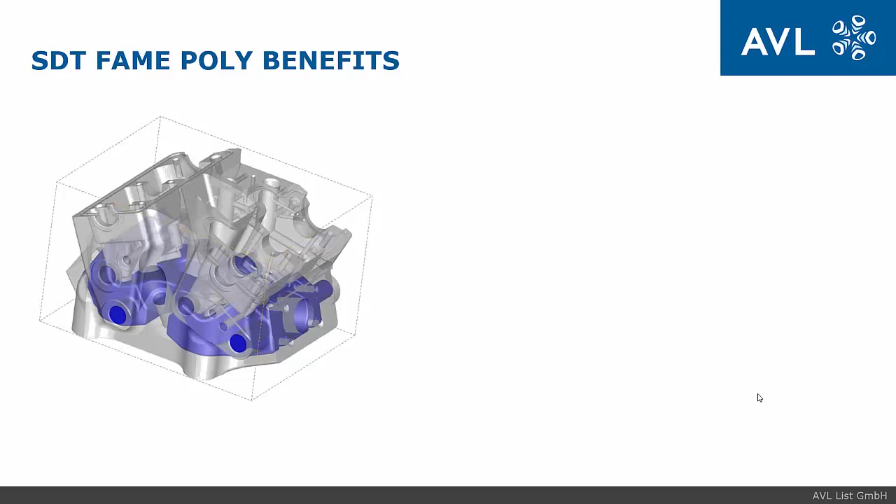I will start at the beginning with Poly benefits. The preprocessor of FireM has many possibilities, from multi-domain meshing, user-defined boundary layers, to embedding different volume meshes to Poly while avoiding arbitrary interfaces. The related graphical user interface is fast, reliable and modern looking.

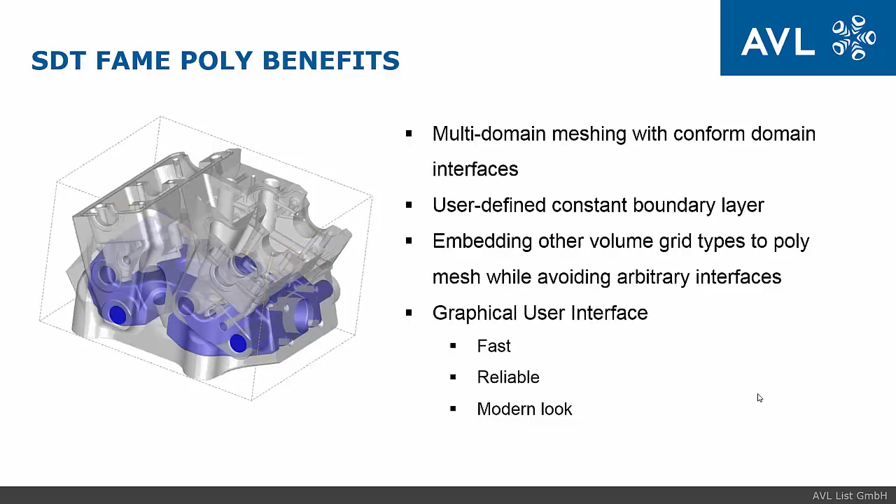In today's session, I will introduce how we can get a mesh from importing the surface, with preparation to make a quality check and surface repair. The next required input is creation of selections and edges. And finally I present the advanced mode of the meshing process.

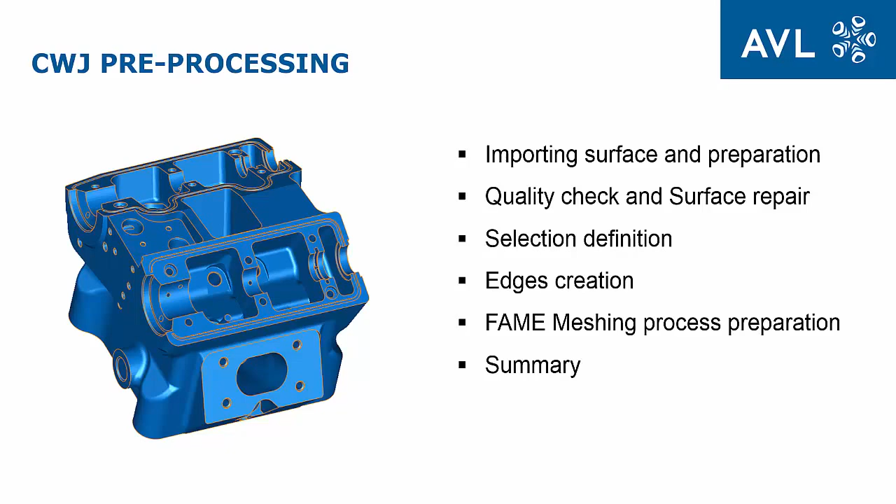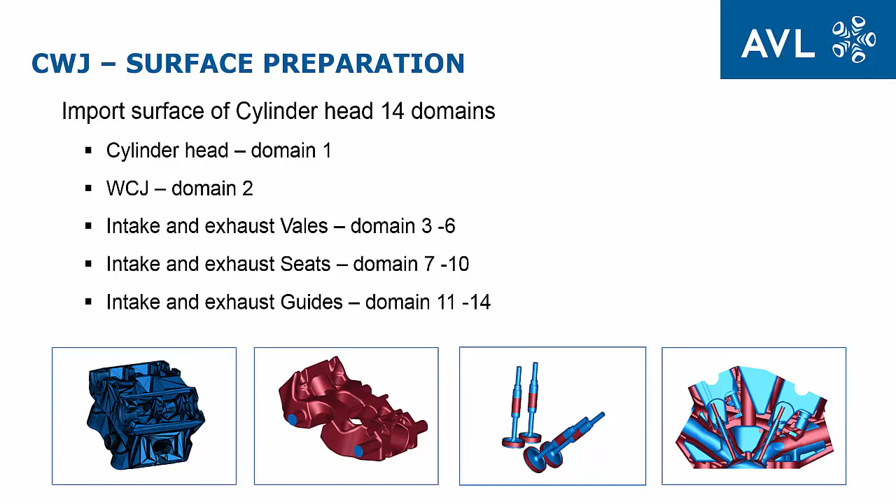On importing the surface with 14 domains, it is suggested to check all of the domains. I demonstrate to you all the corresponding domains. First is the cylinder head, the second one is the water cooling jacket, and the rest of the domains belong to intake and exhaust valves, seats and guides.

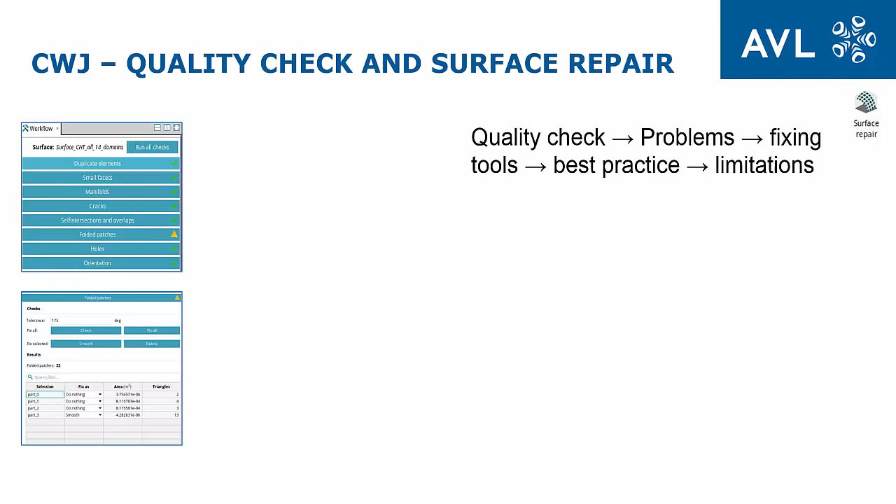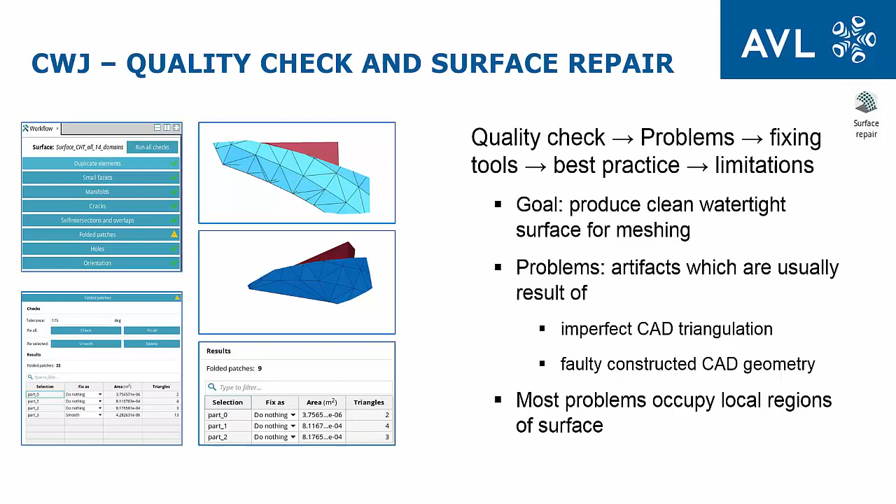The quality check is required as the next important step. To handle the problems in the surface mesh, some practice is needed. What should be fixed? The major goal is to produce a clean, watertight surface for meshing. The artifacts usually come from imperfect CAD triangulation and faultily constructed CAD geometry.

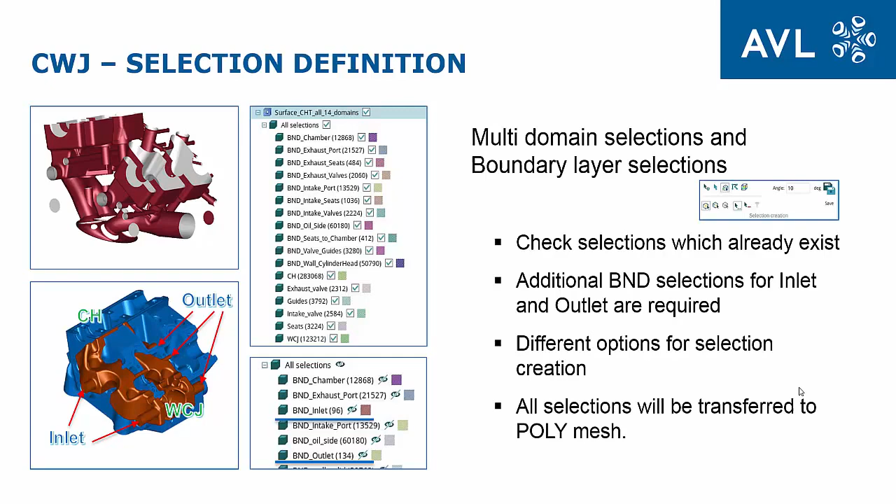The next step which should be applied is selection definition. In this example, we already predefined the required domain selections and almost all boundary selections. It is not intended to show creating all of the selections. I will show only additional boundary selections for inlet and outlet. All selections will be transferred to the polymesh.

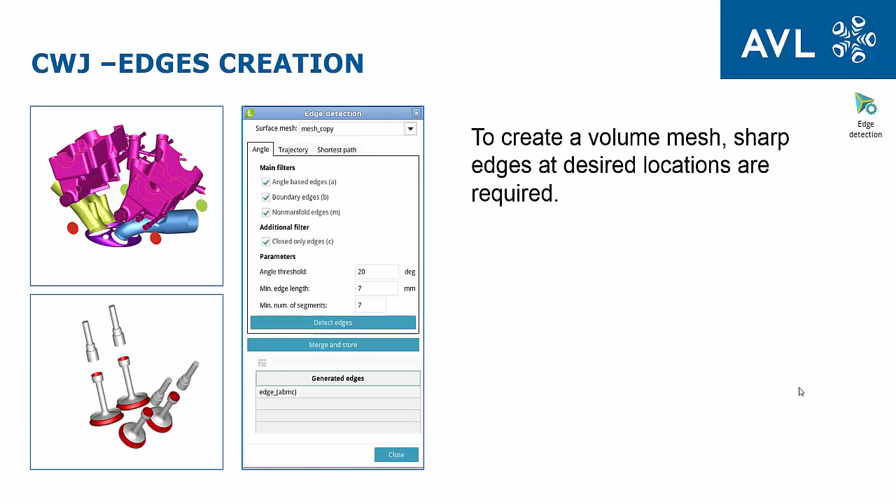The last step before meshing is creation of sharp edges. In the first round, the edges can be made by automatic detection, and it is also possible to manually generate edges depending on the chosen selection or chosen domain. The figure on the top left side shows the edges for our demonstration cylinder head model. I will show how to add edges manually with trajectories and also the shortest path over the valve seats.

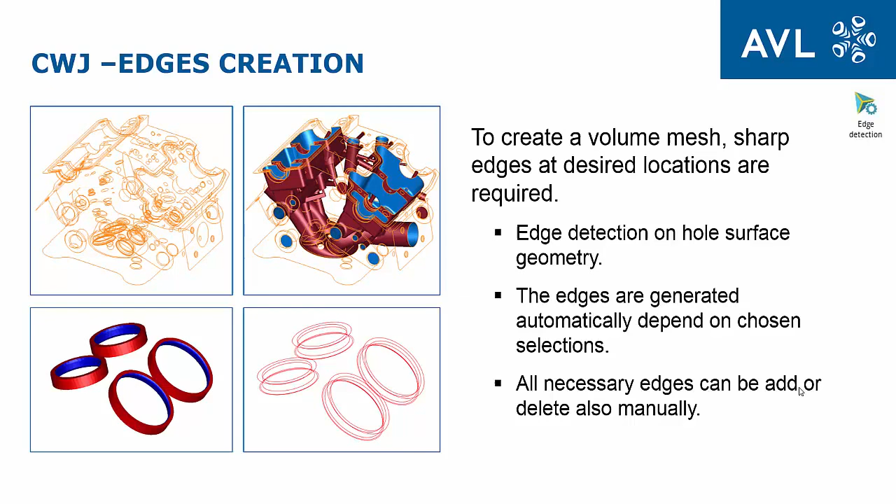And finally, the meshing procedure. The cylinder water jacket multi-material is a complex geometry and some local refinements are required for meshing. I would like to explain the advanced mode of meshing. The basic options include surface and volume target cell size, number of boundary layers and boundary layer thickness. The Analyze button will check the corresponding surface and edges for self-intersections and also watertightness of the surface.

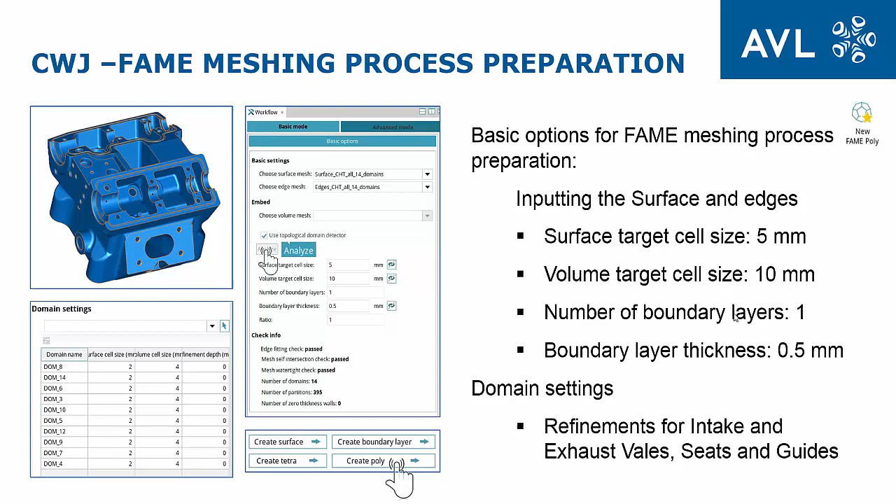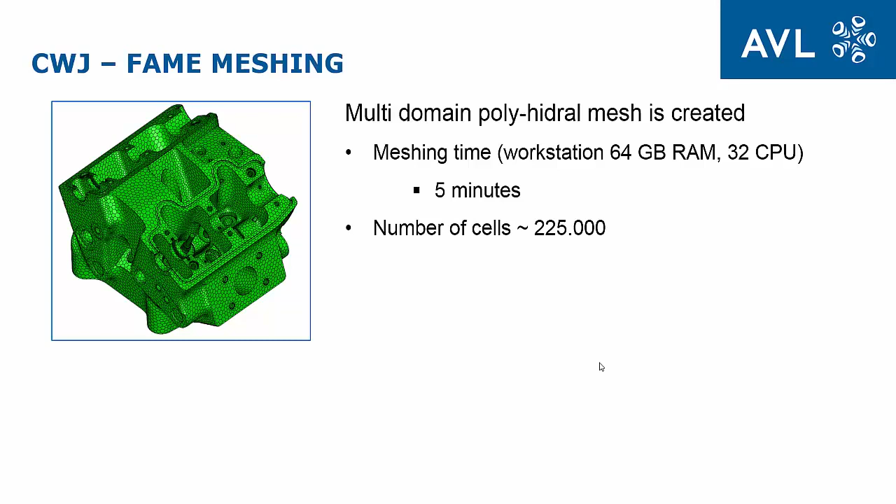After setting all necessary parameters, from basic options over discretization settings to boundary conditions, the user should just apply them to create a polymesh. The multi-domain polyhedral mesh is created within about 5 minutes with the previously shown settings. The mesh is coarse with approximately 225,000 cells. It can also be finer. At the end of the pre-processing session, I will perform the final check and find that the mesh is suitably prepared for CFD simulation.

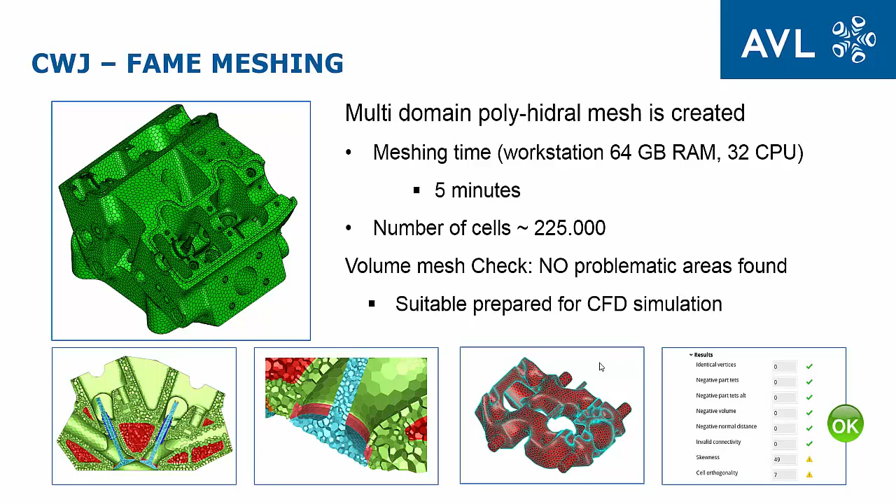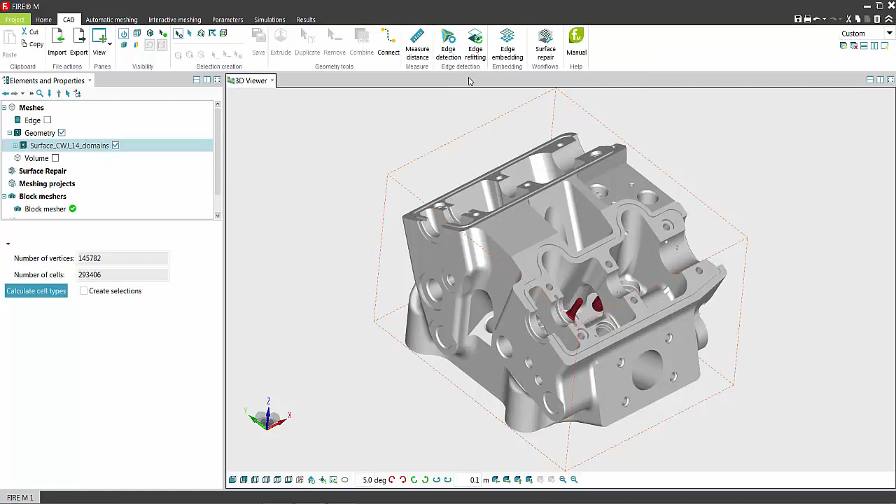Now we switch to live. After opening a new FIRE M, we will import the surface to the 3D viewer. While the surface is loaded, we will perform the surface check in the Surface Repair tool as the first step. The surface should be activated in the element tree, also possible to activate it in the 3D viewer. Start the Surface Repair tool. The new workflow window pops up automatically.

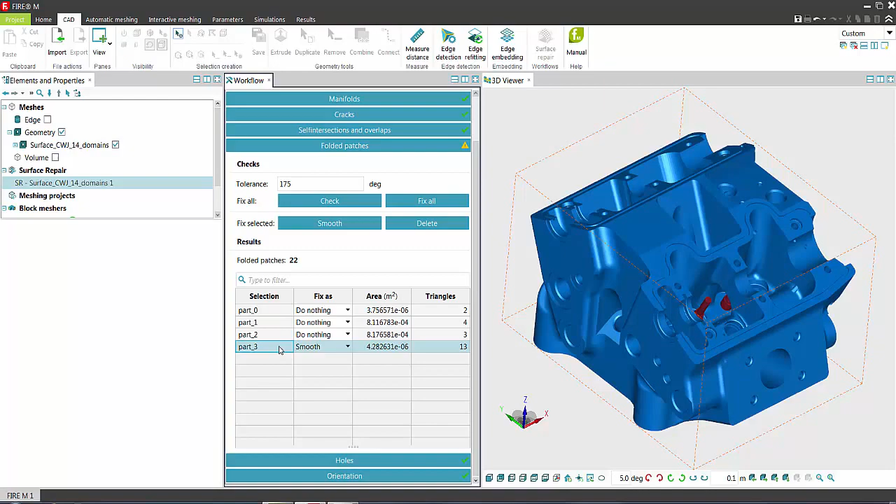Now run all the checks. While observing the artifacts, we found that duplicate elements, small facets, non-manifolds, cracks, or self-intersections are not present in the surface geometry. Some folded patches exist in the surface. As auto detection, the fix is selected as do nothing. We could leave those patches in the geometry. For demonstration, we will repair a few folded patches to see the repair workflow. After selecting them in the table, they are shown in the viewer on the surface.

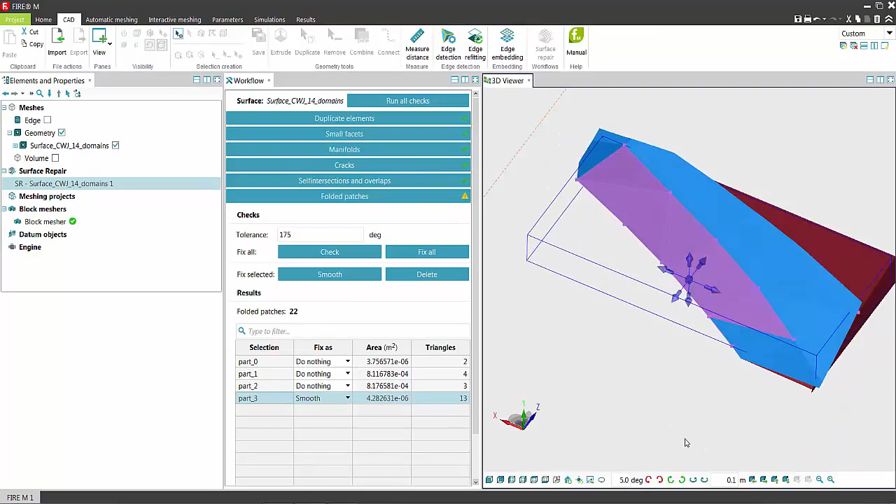We can also apply different visibility as triangulation on surface. After selecting triangles, we remove them by pressing Remove in Geometry Tools. We repeat the step for others.

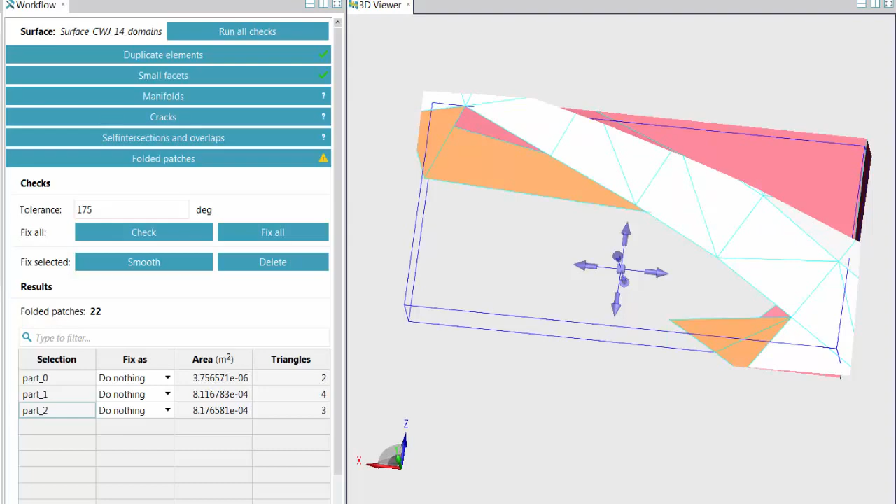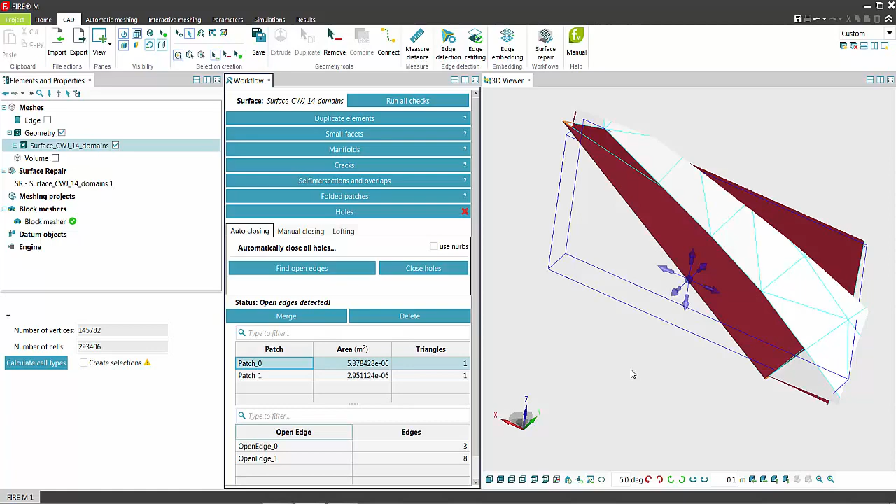Now continue to repair holes and find open edges. The hole is found and edge is generated. After pressing Close Hole, the patch is generated just on one side, clearly and precisely closing the hole. Repeat the procedure for second patch.

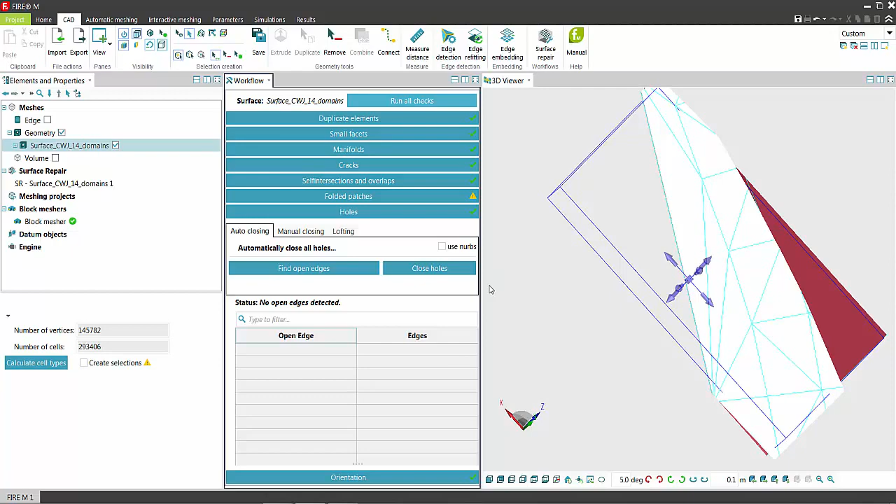Now let's perform the final check. After all check marks are green, we can continue forward. To undo the view, we use Reset Cutting Box in the visibility window.

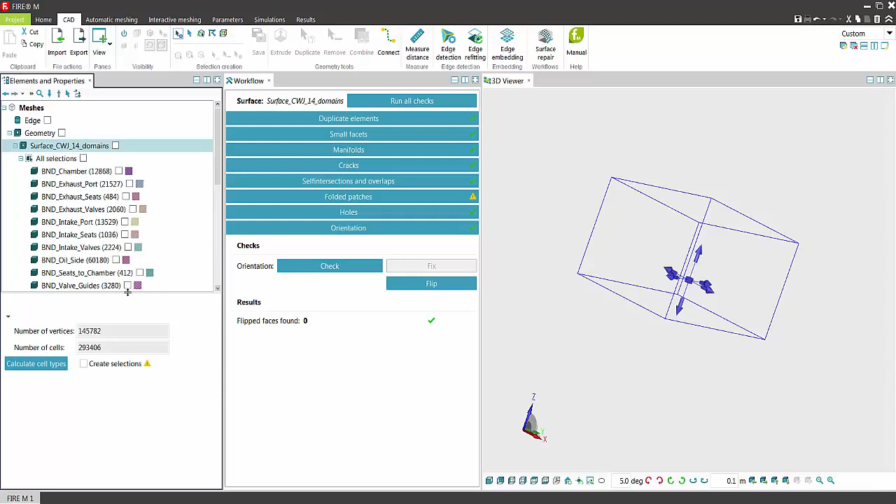The next step is checking selections. This we can do in the element tree by expanding the toggle switch. We can check domain selections and boundary selections by activating and coloring them in the element tree. Using the Ctrl and Shift buttons also helps to do this.

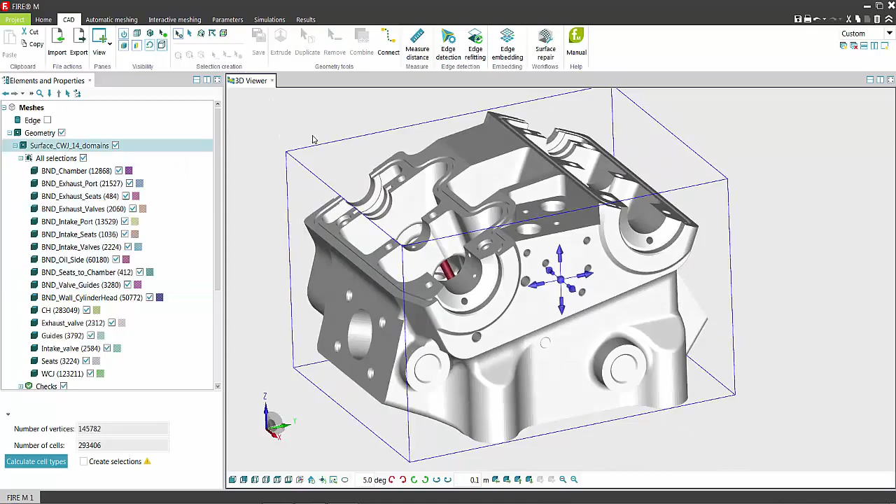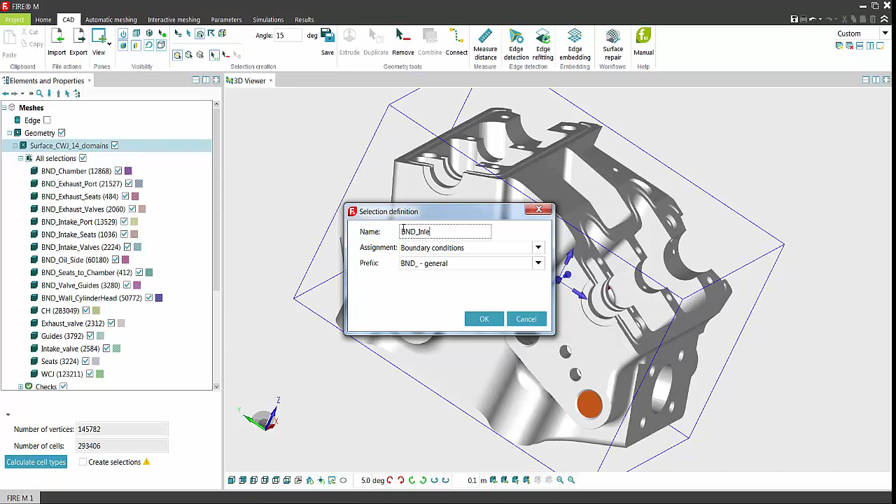For creating selections for inlet and outlet, we will use angle-based selection. We change the angle to 15 degrees and now select the inlet of the water cooling jacket. For saving selections, the Save button in the ribbon bar is used. Add a name, BND_inlet. Then repeat the procedure for BND_outlet.

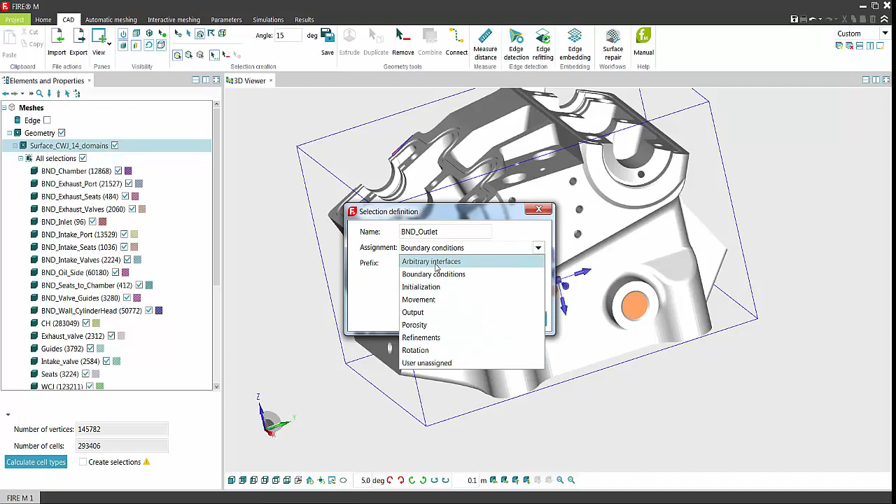If the name of the selection has a prefix such as BND, INI, or else, the selection is automatically saved under a specific folder with the given name. Now we continue to create sharp edges on surface geometry. The cut geometry has to be activated.

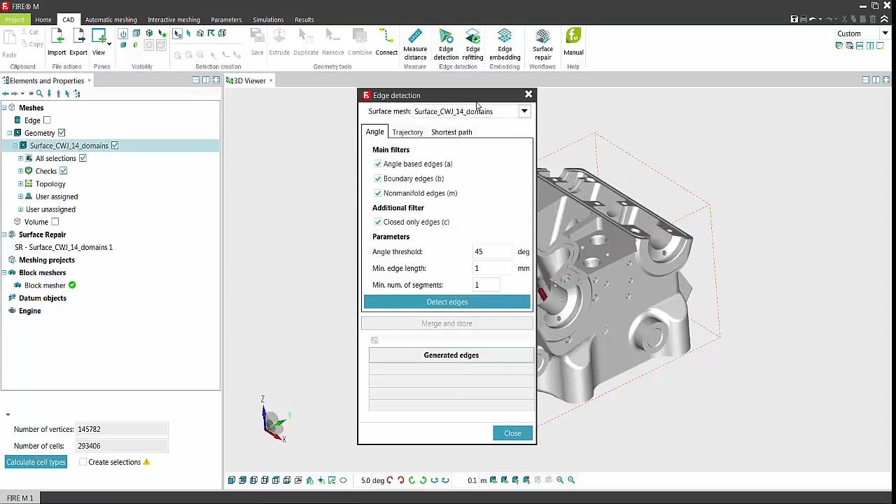By pressing Edge Detection in the ribbon bar, we have to define parameters for locating edges. From the default values, change to 20 degrees for angle threshold, 10 mm for minimum edge length, and 10 for minimum number of segments. Now I will apply Detect Edges.

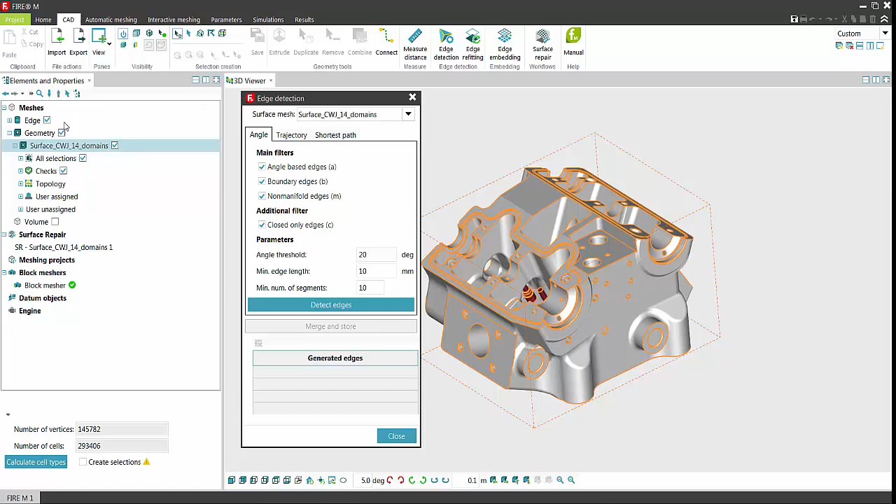While edges are generated automatically, we should merge them to geometry and store them to the element tree in the project. Since some unnecessary edges were created, we can manually delete them from saved edges. I will remove them with angle-based selection and also polygon-based removing.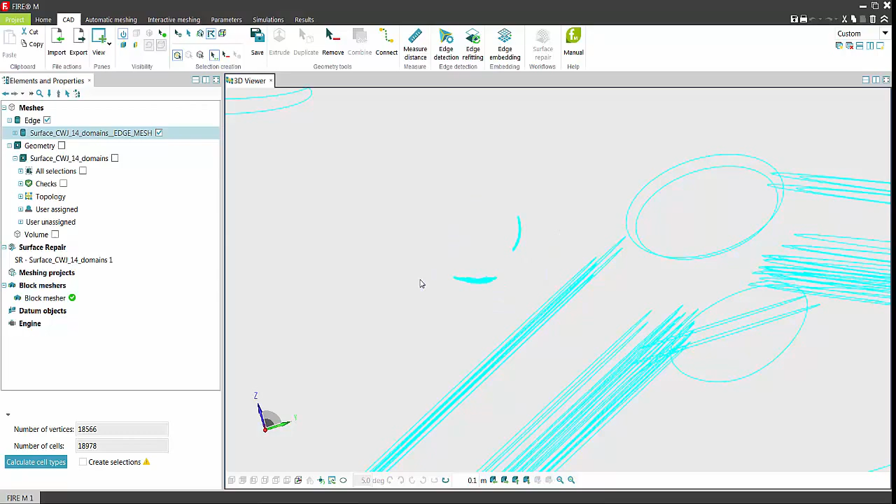I will show how to remove edges with polygon selection. Go around the edges and confirm with the Enter button, then press Remove. Now we will continue with removing unnecessary edges around guides. I will use an angle-based selection and repeat the step, confirming with Enter and selecting Remove from the ribbon bar.

Now we click on an edge near the guide. When some edges are selected, they are highlighted and can be removed.

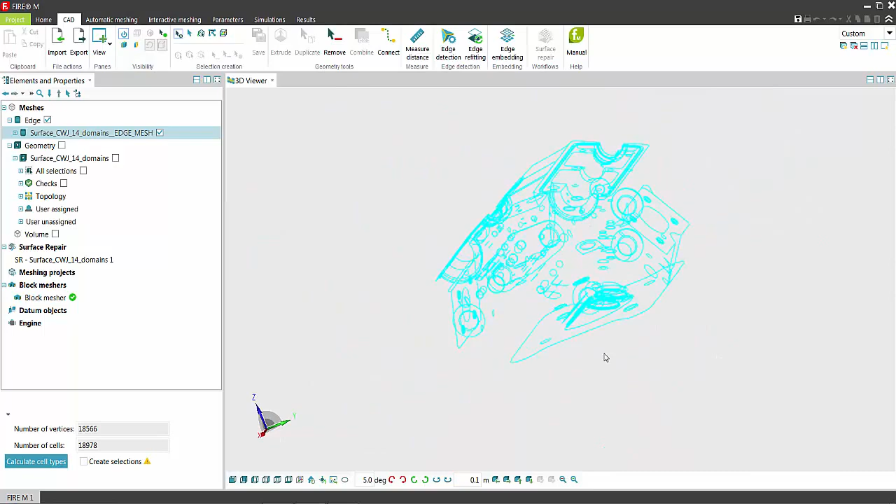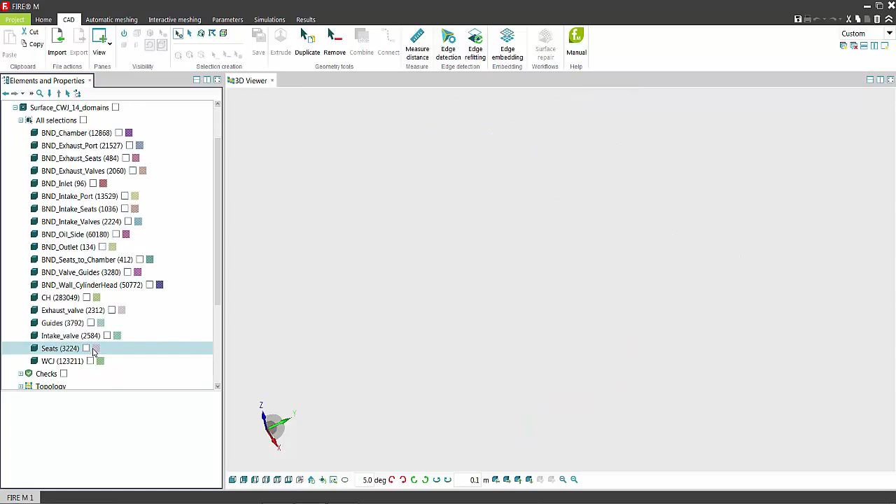For prescribing all necessary edges, we can add them manually over selected domains or boundary selections. In the element tree, I will select the selection of intake and exhaust seats, and after they are visible in the viewer, click on duplicate the selection. The new geometry is created and shown as mesh copy in the 3D viewer and also in the element tree.

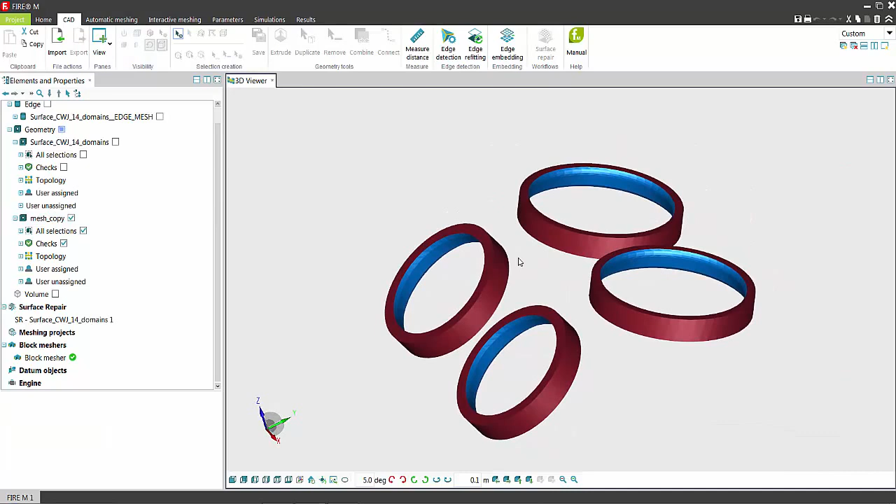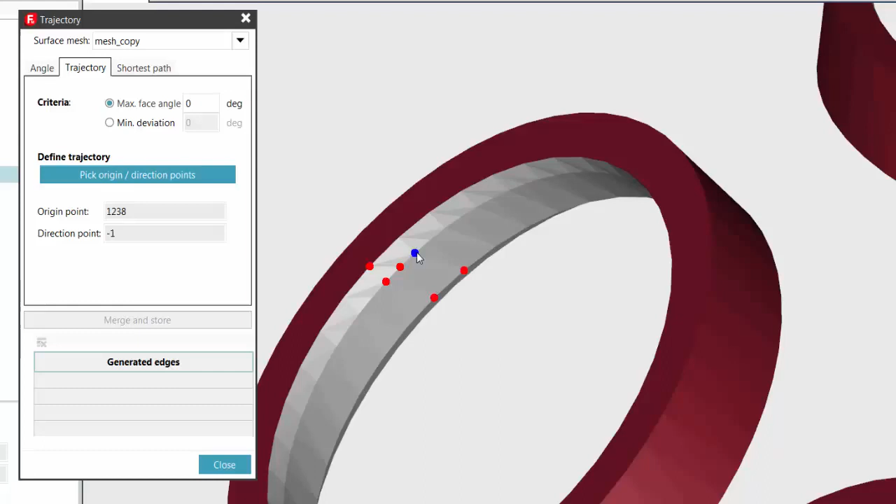Multiple selected selections can also be used for generating edges. Select only seats as mesh copy in the element tree and open the edge detection window one more time. Switch the tab from angle to trajectory and select Define Trajectory. The first click on the model is the location of origin and the second click presents the direction of the edge around. Let's repeat this step for all sharp edges on valve seats.

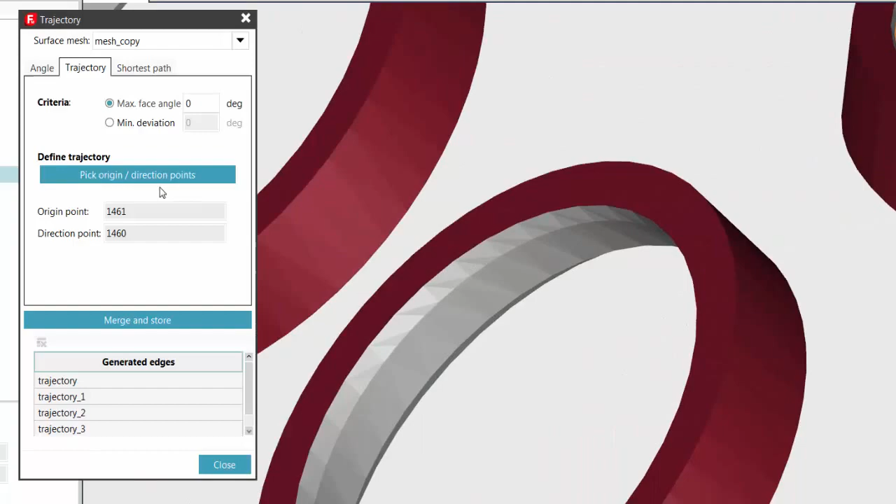For completing the operation, we should save all trajectories to edges with Merge and Store. For joining auto-detected edges and manually made edges, we select them both in the element tree and combine them with an action in Geometry Tools. Previously created edges can be removed from the project.

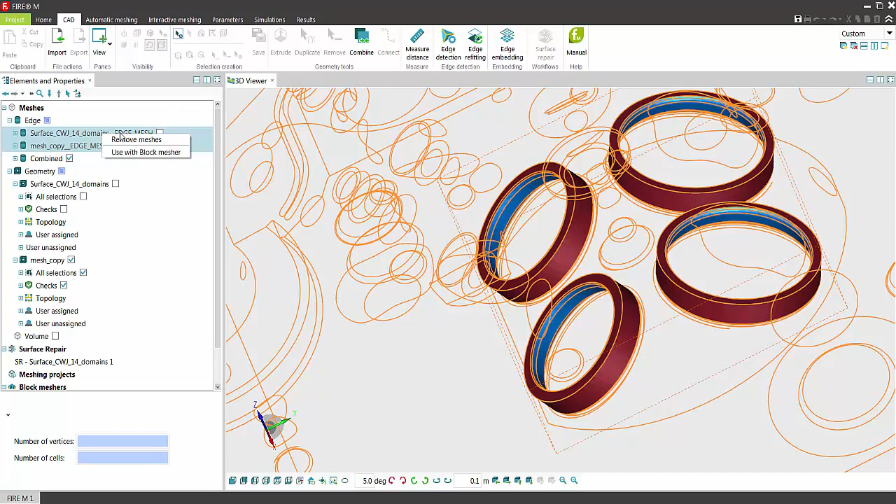Now we can also delete the mesh copy of intake and exhaust seats. Now we have only the created edges and the surface inside the project. I will save the project now.

So the name is given as Fire M1 and the prefix is PROG. Let us proceed to the final step in the pre-processing session.

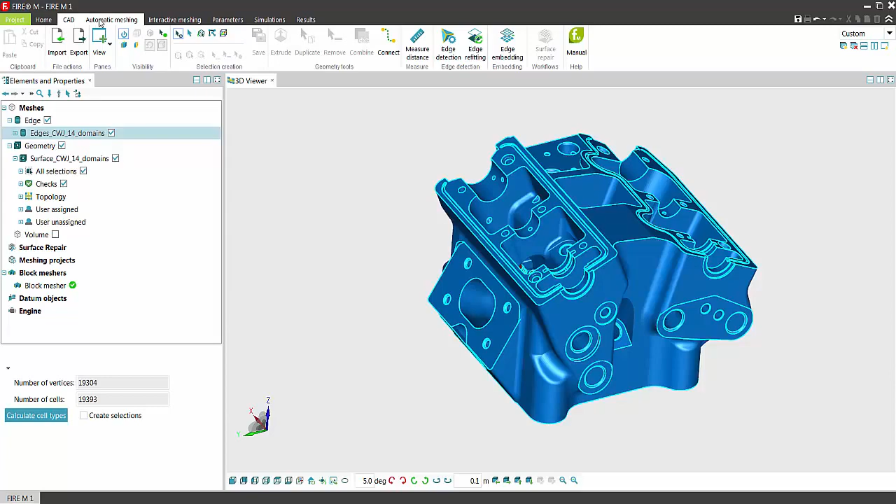In the tab menu, go further to automatic meshing. We can start now a new FAME poly meshing, then switch to advanced mode of meshing.

If in the project only one surface and one edges exist, they are automatically selected in the chosen menu. Press the Analyze button. It will check fitting of corresponding edges, self-intersection, geometry check for water tightness, and also number of domains. If all checks are passed, we can continue to set the meshing procedure.

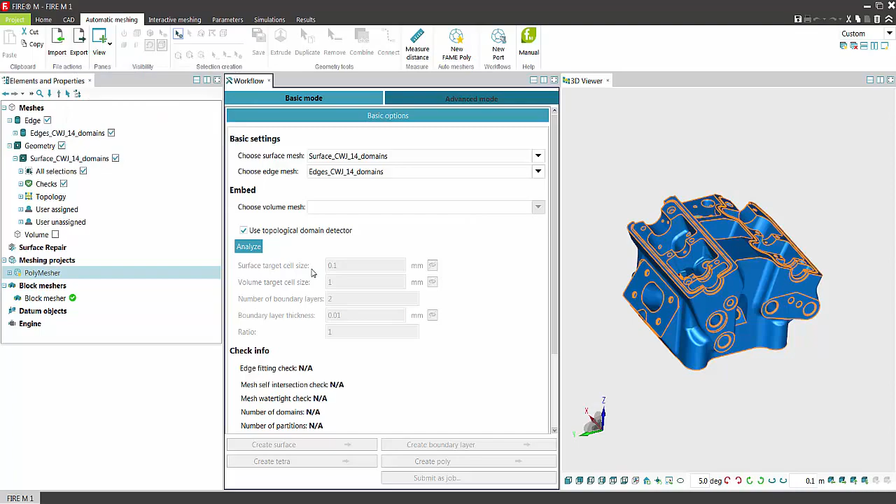We got 14 domains. We will set basic options for meshing. As for surface target cell size, we use 2 mm, for volume target cell size 4 mm, and one boundary layer with 0.5 mm of thickness.

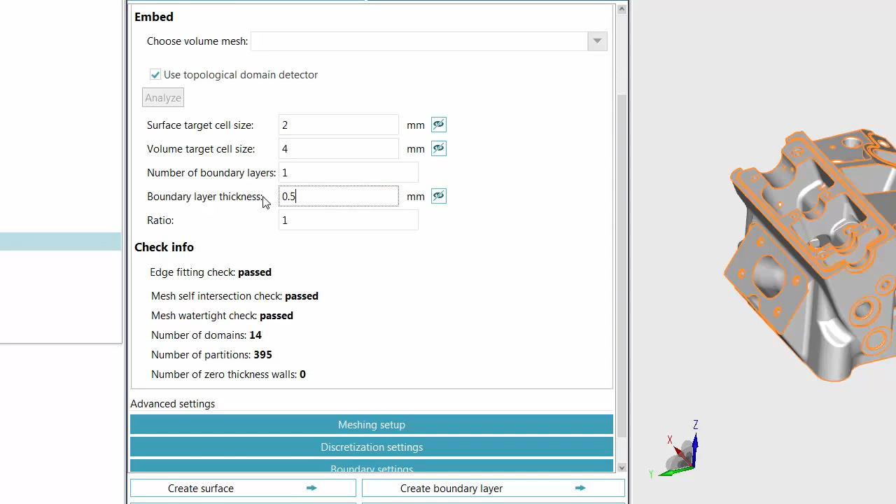In meshing setup, we can check domains and change the type of state as solid and fluid. After meshing, the domain name will be set as the selected state - so FL for fluid and SO for solid.

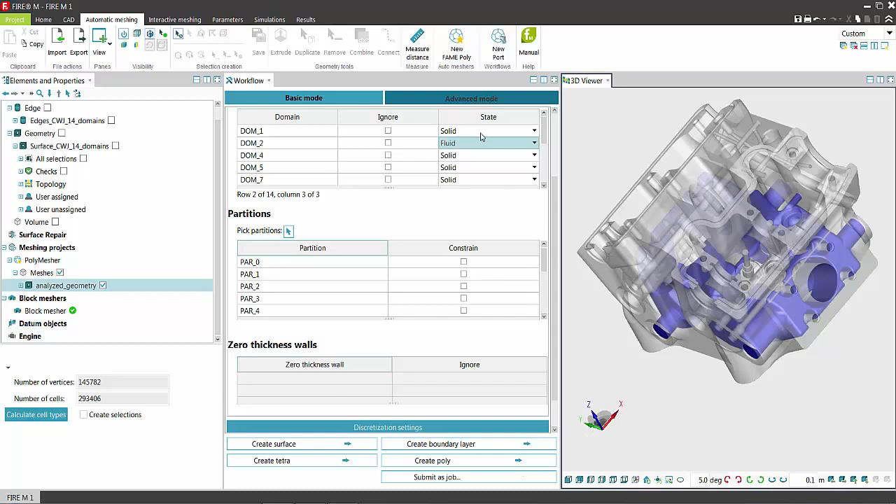In the partition section, we can define constraints for automatically generated partitions, if we want to generate the mesh from exactly the same vertices as the surface has. This is used in the embedding option.

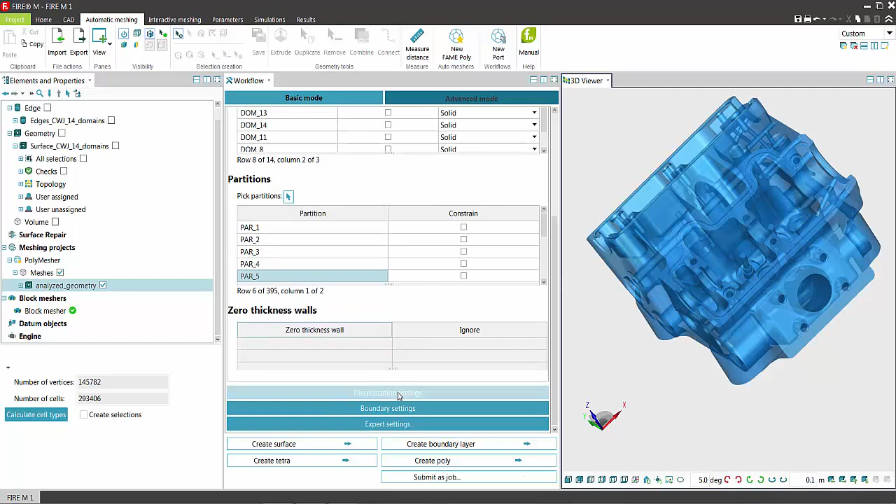As we continue to discretization settings, the local refinements are also based on domain selections and partitions. The toggle switch for auto refinement is activated by default, and minimum cell size is also defined over basic options as the target cell size divided by 10.

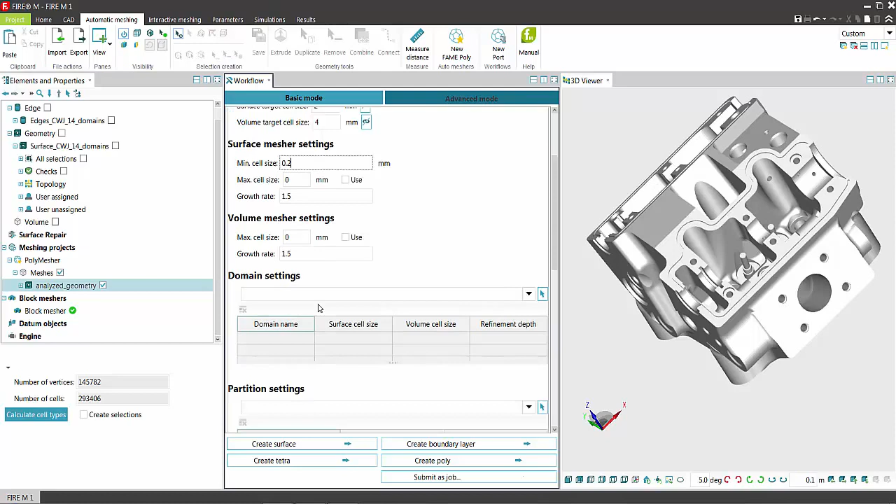As in this example we have multiple small domains, we will generate the mesh with refinement based on considering the intake and exhaust valve, seats and guides. I will just deselect the cylinder head and water cooling jacket domain - they are bigger.

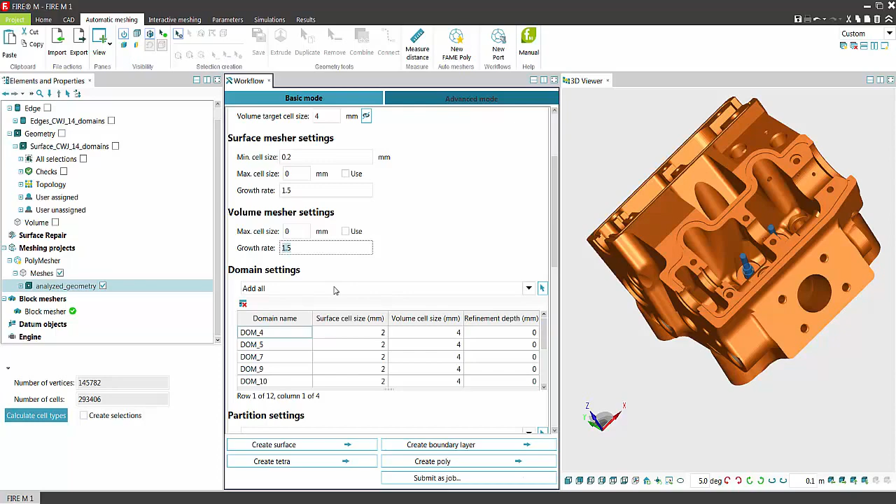Also, one important setting in discretization is growth rate. It is prescribed by default value as 1.5 in surface and volume mesher settings. This means that cell size from the surface grows from 2 mm to the volume cell size of 4 mm inside the volume mesh. This considers reducing the number of cells in the whole domain.

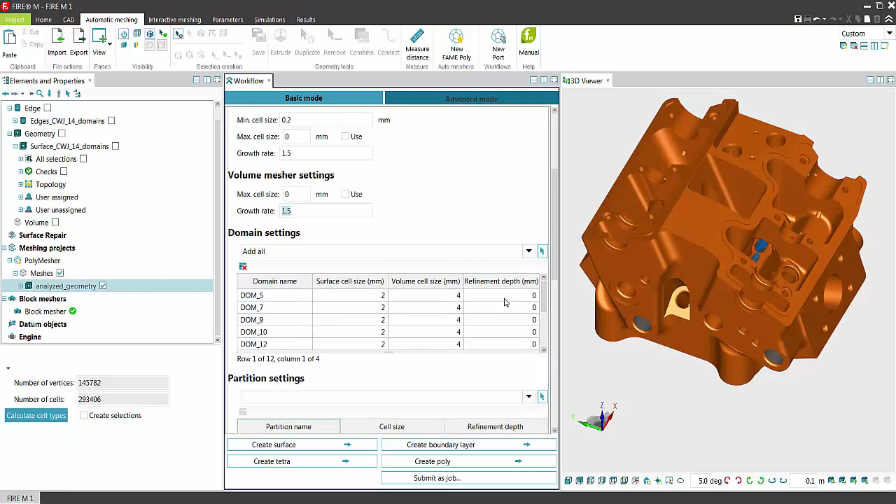We can also avoid growing cells inside by specifying a refinement depth. For refinements, we have other possibilities as well, such as using a datum object like a cylinder, or cone-based refinements for the spray model.

Afterwards, we change the surface and volume target cell size to coarser, with the reason being less cell count. Change surface target cell size to 5 and volume target cell size to 10 mm.

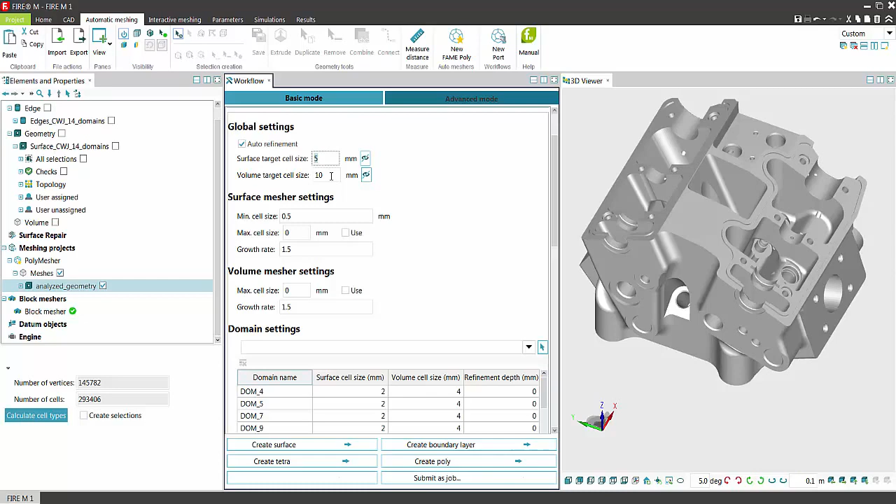Under boundary settings tab, we can set all global parameters for the boundary layer and also define the thickness of the boundary layer on the desired selection. Connecting edge can be applied to partitions of the model which were created automatically. One possibility is also to pick them from the geometry in the 3D viewer.

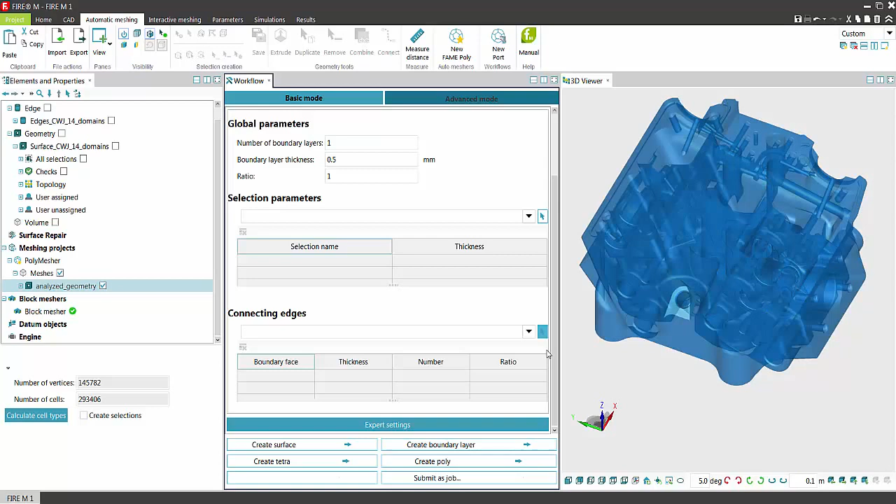The last step is expert settings. They are used for complicated geometries - for embedding, decoupling multi-material mesh, and a few other settings. In this session, it's not intended to explain all of these features.

The related check mark in expert settings is for decoupling multi-material mesh. It is activated by default and will produce all domain interfaces in the multi-material mesh with names like DIF_1 and _2, and the rest of the interfaces.

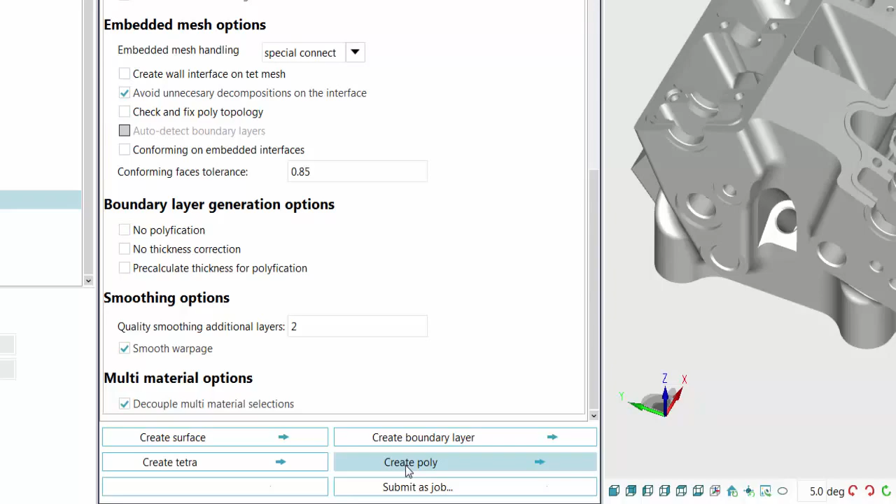After setting all parameters for meshing, we can execute the meshing procedure by pressing Create Poly. The meshing procedure is done. The poly mesh is uploaded in the 3D viewer and placed in the element tree under volume.

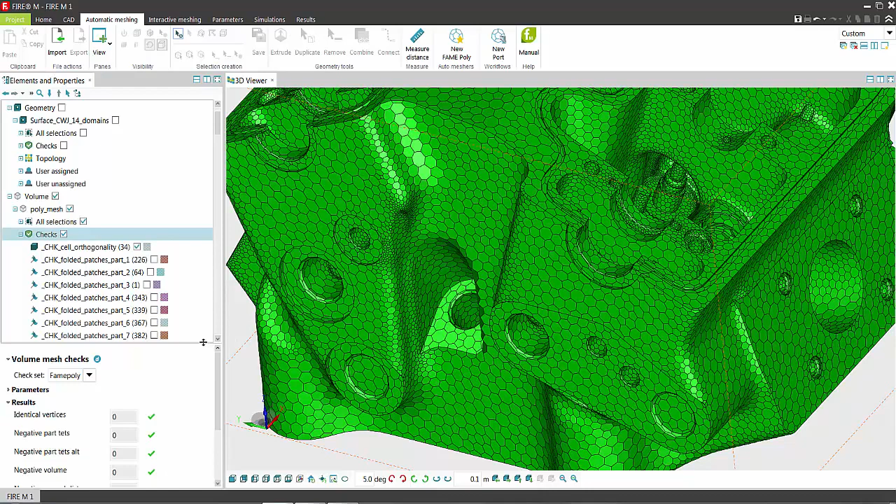Expand the node of volume and perform checks of the created poly mesh. We use the check set for FAME poly. Press the check button - the algorithm will check if the mesh has any identical vertices, negative volumes, invalid connectivity, skewness, and cell orthogonality. We can apply the check to specific domains.

I will activate the water cooling jacket and intake and exhaust seats, valves and guides. We can play a little bit with visibility options in the ribbon bar, from creating cutting views with wireframe or transparency view.

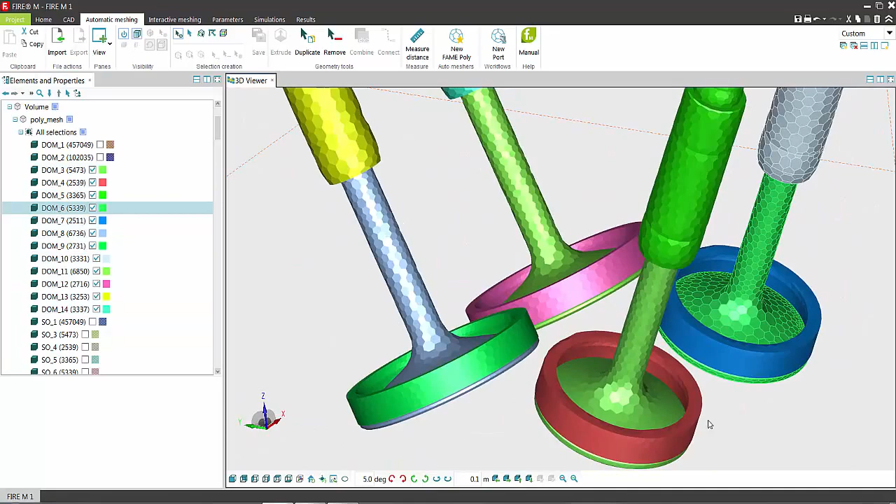It's very simple to adjust the view with the toggle cursor. We can move the cut to the right position.

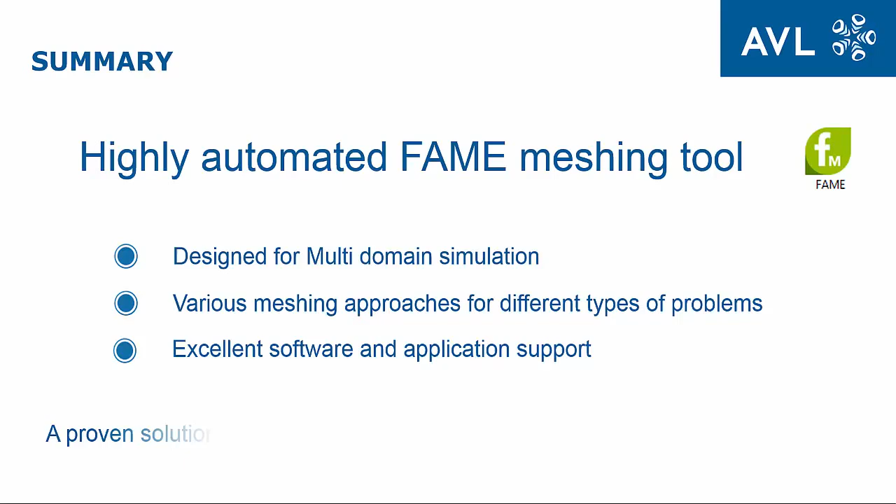With this slide I will end my presentation of FAME, which is a highly automated meshing tool designed for multi-domain simulation, with different meshing approaches for different types of problems. I would like to thank you for your attention.